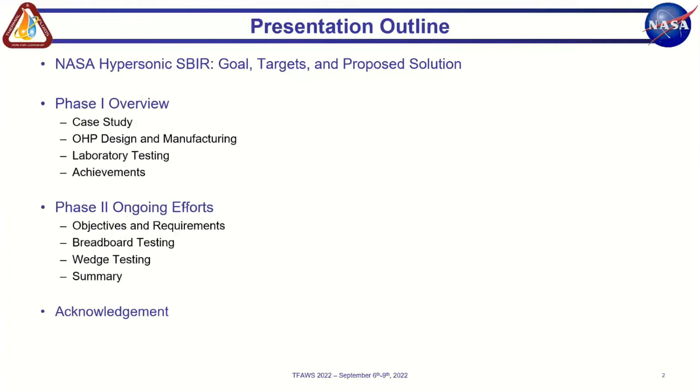Presentation outline: look at that original solicitation that we were responsive to, goals, targets, and our proposed solution. Overview of the phase 1 work, and then overview of the phase 2 work that we are now essentially at the end of the phase 2 period of performance.

The goal of the program was to develop a wing leading edge skin structure with novel integrated thermal management using our flagship technology, the OHP. The SBIR timeline - we're here actually on a no-cost extension to complete some high-value testing that we really wanted to complete on the program, but this program's essentially wrapped up.

The original solicitation from NASA that we submitted the proposal to was looking for these 4 items in particular that really resonated with what we were thinking at the time on the program.

These are looking at manufacturing approaches that can fabricate complex devices such as heat pipe cooled leading edges, lightweight materials that can repeatedly reach high service temperature, capabilities to fabricate complex geometry incorporating integral heat pipes, and multifunctional structures where you incorporate thermal management and structural load capabilities into an integrated component. So a lot of buzzwords here for us in general in terms of multifunctional structures and sort of integral thermal management.

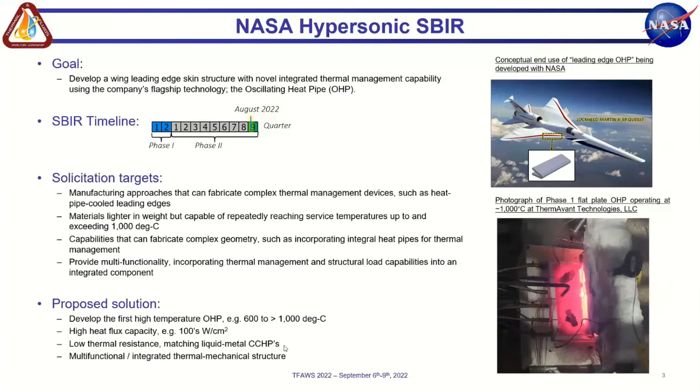So our proposed solution was to develop the first high temp OHPs, looking at 600 up to potentially above 1,000 degrees C, which at the beginning of the phase 1, 3 years ago, had essentially never been demonstrated. Show high heat flux capacity, hundreds of watts per square centimeter input in the evaporator. Show low thermal resistance, similar to liquid metal conventional wick-based heat pipes, and then this multifunctional structure.

At the beginning of the phase 1, we performed a case study to highlight the utility in actually using an OHP structure, and in doing so compared it to solid metal. So the focus here being comparison to other metallic hot structures, not necessarily towards ceramic matrix composite development.

But looking at this case study, we sort of did a little bit of self-teaching about aerothermal heating for hypersonic leading edges. The output of this is looking at what sort of fluxes are generated at the stagnation line for modest radii - not super sharp, but quarter-inch type radius leading edges - at Mach 6 to 8. You generate these sorts of flux levels at that stagnation line.

So there's a couple important relationships to understand the general thermal map. That's at the stagnation point. Heat flux varies inversely with the root of the radius, so as you go to very sharp leading edges, the flux rises rapidly. As you go up in Mach number, the flux rises with the cube of the Mach number. Hence the general thermal problem as we push the envelope on these hypersonic vehicles.

And lastly, how that flux varies radially as you move off the stagnation line point - it actually drops really closely to cosine as you move back around this leading edge.

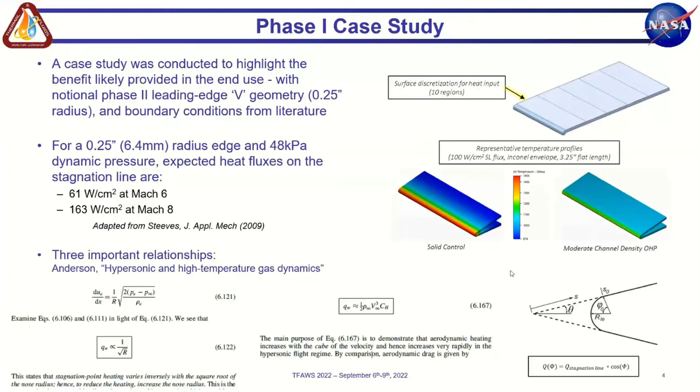So back in the phase 1, we did a series of finite element simulations, and one of the takeaways was we think compared to a solid Inconel leading edge structure, which isn't really a competitive solution for hypersonic leading edges - but if you were looking at that sort of metallic hot structure and you simply converted that structure to including the embedded microchannels and working fluid and had a functional OHP, then you could drop that peak temperature at the leading edge by 250 K at around Mach 6.

So we looked at various sensitivities to different channel densities and transport lengths shown by these other series. But the key takeaway is that OHP enables essentially more aggressive heat input conditions related to higher Mach number flight conditions for some given material's working temperature ceiling.

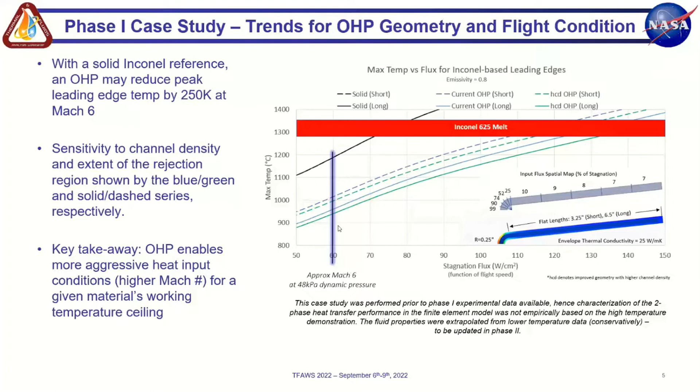So if you're working with an Inconel type superalloy, you might have a mature understanding of the maximum service ceiling in terms of the yield strength of that material or other properties, and by producing the same structure but instead of being a solid conductor, making the OHP, we can vastly improve the thermal characteristics, the ability to transport heat, but retain most of that structural integrity.

So the phase one hardware did not go for gold with the really complex leading edge wedge geometry required, but we went with simple 6-inch scale breadboards because the first push here was to actually demonstrate viable working fluids and functional OHPs in simple geometries, and then a pivot from there to complex geometries.

So we started with traditionally manufactured CNC and vacuum brazed breadboard OHPs at 6-inch scale. You can see one here, and the heat map.

The way they were actually tested, we took this notional future form of a leading edge geometry with a high flux input on the wedge. You transport the heat back and radiate off the adjacent surfaces, with some sort of near adiabatic internal surfaces in the wedge.

And if you flatten that out, you basically get what we tested in phase one and actually in most of phase two as well, in terms of centerline heat input and then radiation and free convection in our test bed off the adjacent surfaces.

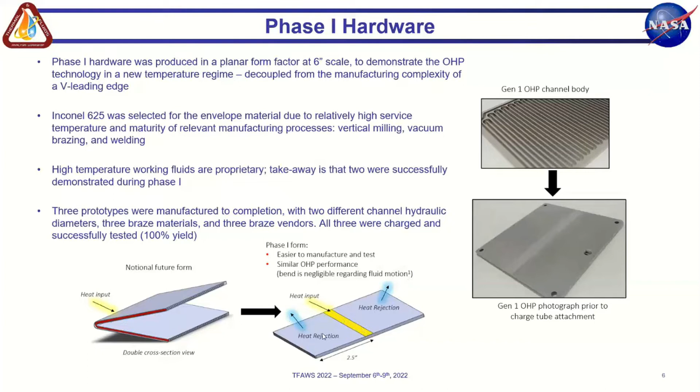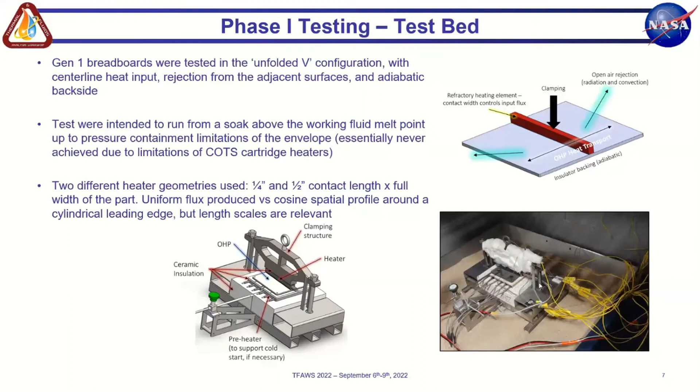So here we see a picture of that phase one test bed, the CAD and the physical one. We worked with two different heat input geometries, a 1/4-inch long contact patch and a 1/2-inch long contact patch, formed by the physical interface with these molybdenum blocks that we used with commercial off-the-shelf Incoloy sheet.

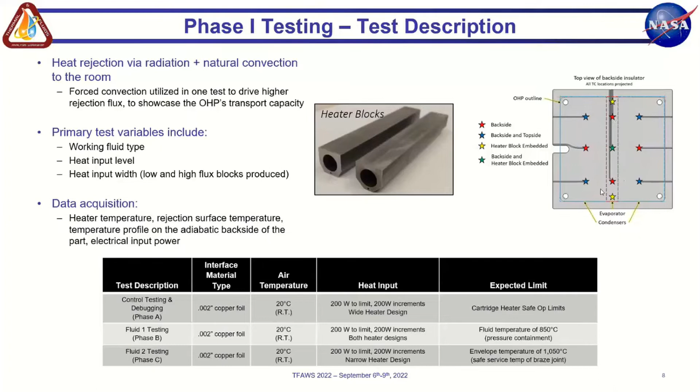Cartridge heaters were fed inside. We applied electrical power that was driven into the OHP evaporator at this clamped interface. TC map shown on the right. We have TCs essentially in the heater block and on the physical rejection surface, but also on the backside where we have that adiabatic boundary, with ability to place TCs there as well.

So coming from effective thermal conductivity of the base envelope, on the order of 20 watts per meter K, up to like an aluminum or better type number, but of course with much higher service temperature than you would see from aluminum or copper.

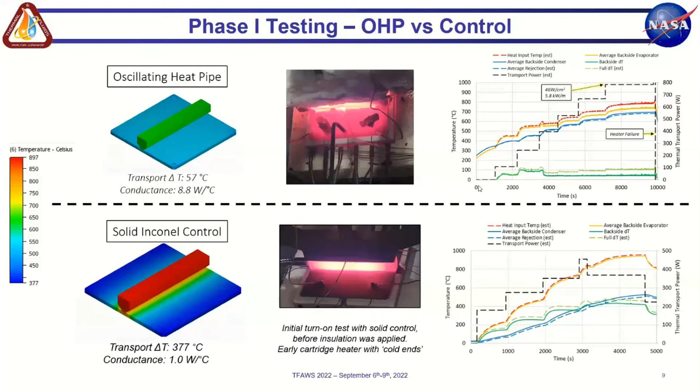We were able to see the onset of nucleate boiling, and in some of the time series plots you can maybe see it here. You see the DT across the device, the spatial gradient drops sharply when we hit a new power step, and the fluid temperature rises. You see that spatial gradient improve sharply, and we attribute that to the onset of nucleate boiling, which is well predicted by this red curve in the limits chart.

And demonstrated actually 2 working fluids during that phase 1, and these, to the surprise of most people, were not liquid metals. These are different elemental fluids that have high vapor pressure. Demonstrated a manufacturing process, so a little bit of MRL development in phase 1 to prepare for the desire to produce wedge geometries in phase 2.

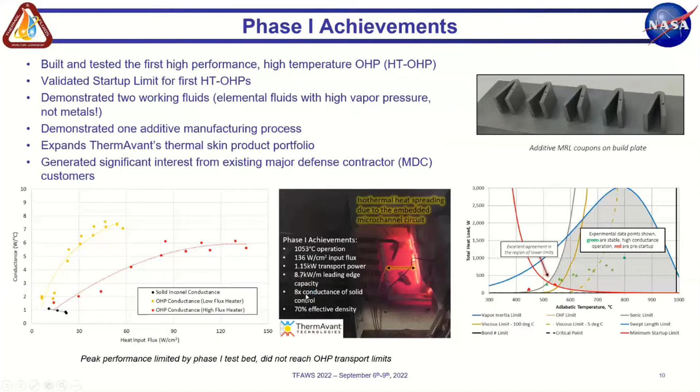All the phase 1 testing was testbed limited, did not reach any OHP transport limits, but we were able to demonstrate these key characteristics shown in bullets: get up to just over 1,000 degrees at the input surface of the Inconel envelope, input flux is a little over 100 watts per square centimeter at the evaporator, 70% effective density of the outer envelope of the same geometry Inconel due to the void space and the lower density fluid charged inside, and approximately 8x conductance of the envelope itself.

So moving to phase 2, a variety of technical objectives and task descriptions, actually an updated program targets that were largely copy-pasted from a DARPA program called MOC. It's an acronym, but looking for a wedge that can take high input flux and survive up to high temperature.

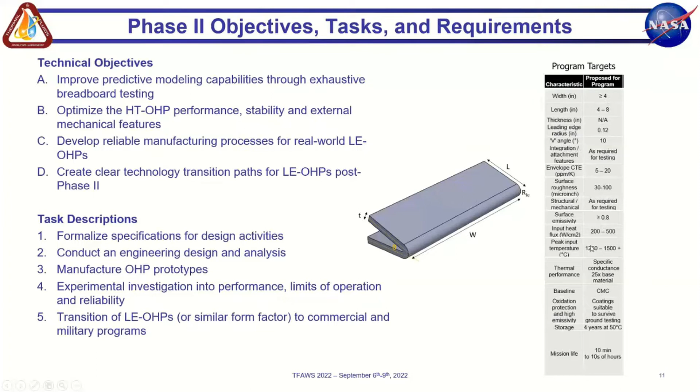So on phase 2, we did a variety of testing organized by the way we heated the part, and the heating configuration in the test bed. Here we have a single heater applying heat to the top center line of the part, and radiation and free convection from the adjacent surfaces.

We pivoted to using a different working fluid, which is liquid metal. We have improved chemical compatibility with the envelope materials of interest, superalloys, wider operating range than the fluid shown in phase 1, higher critical point and lower freezing point, both valuable.

And again, with this new working fluid, we've been able to experimentally demonstrate a predictable startup in relation to the OHP limits of operation.

Originally pioneered by Bruce Drolen, he actually made an update to the startup limit to better match the startup experimental performance we're seeing with the liquid metal working fluid.

Dashed in the boxes in the lower left, we took one of the phase 1 OHPs out of storage after 18 months, lit it back up, and it works nicely after 18 months of storage, actually with the working fluid frozen. Shown on the right is an IR comparison, showcasing qualitatively the isothermality we can see with the OHP microchannels embedded in the envelope.

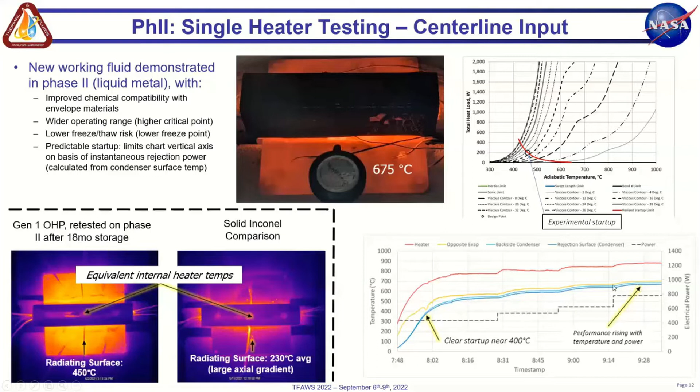As the system gets hotter, you see a dip in the opposite evaporator temperature and improvement in the overall structure's uniformity, measured from that evaporator out to the tips of the part, about 3 inches away from the heat input source. So these series tighten up, showing improved performance as you go up in temperature and power. We're transporting more heat with lower gradient, so the quotient shows steadily improving thermal conductance.

Well, we wanted to go even hotter. Here we're getting up to 675 with the condenser, but we wanted to go hotter. So to do so, we needed a second heater block bolted up opposing the original one in this sort of clamshell sandwich construction.

So we were burning up lots of those Incoloy cartridge heaters, and now with 2 cartridge heaters we're able to run higher powers. At 1.2 kilowatts electrical in this configuration, we're able to drive the condenser surfaces up to 850C.

We internally like this picture on the right a lot - it generated a lot of excitement internally at ThermAvant to see the ability to make these really hot OHPs that are showing good performance.

One asterisk on this testing is we don't actually truly know the physical evaporator temperature, as the thermocouple probes are embedded essentially on the hot side of the thermal interface, adjacent to the cartridge heater. So we know the heater temperature and we know the OHP condenser temperature, but the delta there includes a series thermal resistance from that thermal interface.

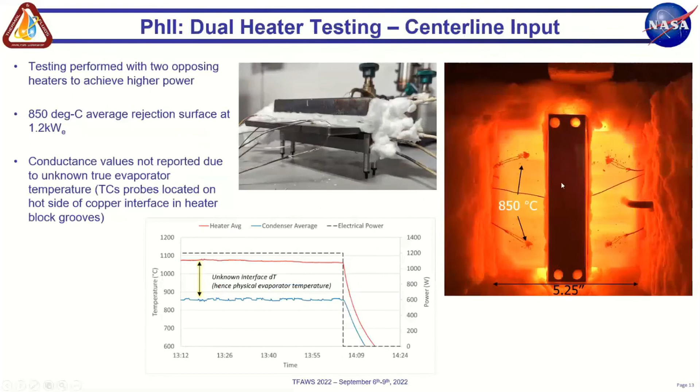Okay, so what's next? We had shown center heating, but the transport distance is only on the order of 2 inches - the full width of the part here is 5 1/4. So we shifted the heater to the edge of the part to try to drive that heat instead of 2.5, more like 4 inches across the part, exploring a longer transport distance.

And it worked well. On this test we got, air quotes, lucky - the cartridge heaters survived with the heater blocks running at the order of 1100 degrees C for this testing, and we were able to get the OHP condenser up to 950C. So this was a really nice test.

We're actually starting to approach the envelope service temperature of that Inconel 625 envelope. The vapor pressure of the fluid inside is actually quite low, as is the nature of liquid metals in this temperature range, so we're not at risk from a factor of safety to pressure containment, but we're out where the yield strength of 625 has really fallen off the cliff. So that's where we pull the plug on pushing the temperature.

All right, so yes, we got about 3 minutes left.

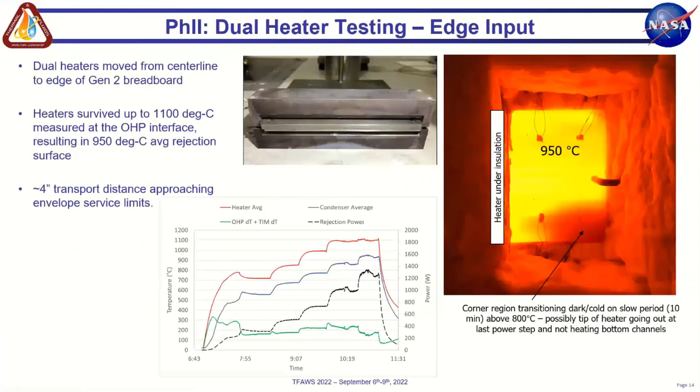Excellent. Okay, so our last breadboard geometry, these planar geometries we tested, was significantly larger - 13.5 inches long, operated in a similar manner. You can see on the right where we put on some Kaowool insulation to provide an adiabatic transport distance, where we have a remote condenser.

So center heated, it's got a transport on the order of 6 inches to a net rejection surface. This worked really nicely, just like the 6-inch scale parts as shown by the IR and the visible here. Again, heat input, about 6-inch transport, able to drive heat out to an 800C condenser.

We have clear, repeatable, and predictable startup at about 550 degrees adiabatic temperature, and actually quite low power. Onset of nucleate boiling here - we can see the spatial gradient in the part fall off a cliff from 500C down to 100 or so, and then again steadily improving performance with temperature and power.

That's plotted here in the lower plot along with the axial flux on the secondary vertical axis. We're actually pushing here, coming up on 2 megawatts per meter squared of the transport cross section, which is a number that's been of interest to some of our folks interested outside of NASA.

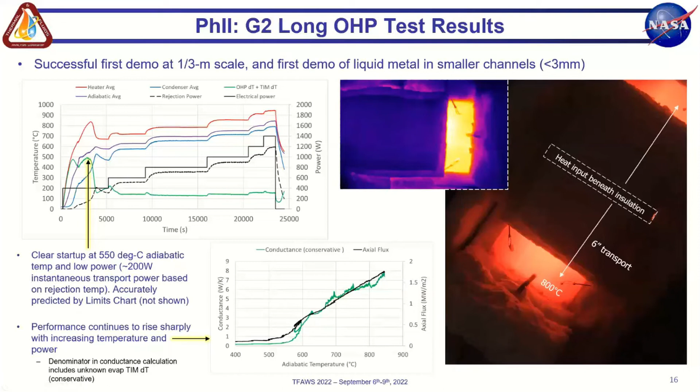Okay, so I only have a minute here. The grand finale was to go from the breadboard geometries that have been demonstrated to the application geometry - a leading edge wedge geometry with this 1/4 inch radius.

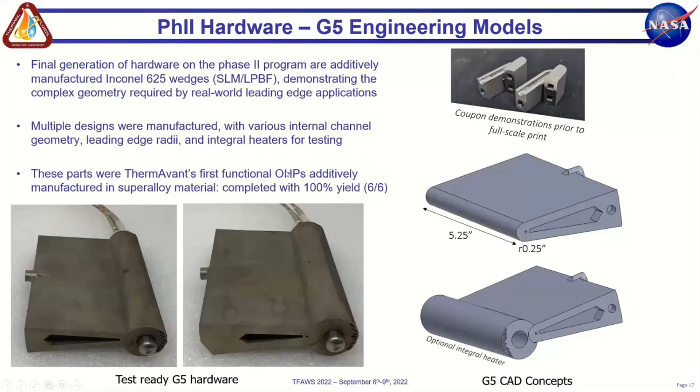So these were additively manufactured and tested successfully. The operation was similar to the same liquid metal working fluid in the planar breadboard geometries of the same scale.

So here we're again using cartridge heaters to drive heat into this tangent point right in the working fluid, which sweeps through the envelope, driving heat right into that tip of the working fluid space. We're able to show a variety of pictures here.

The lower one is a borescope view inside of our argon purged box. Here's a top view through the viewport, able to drive this additively manufactured, powder-based part.

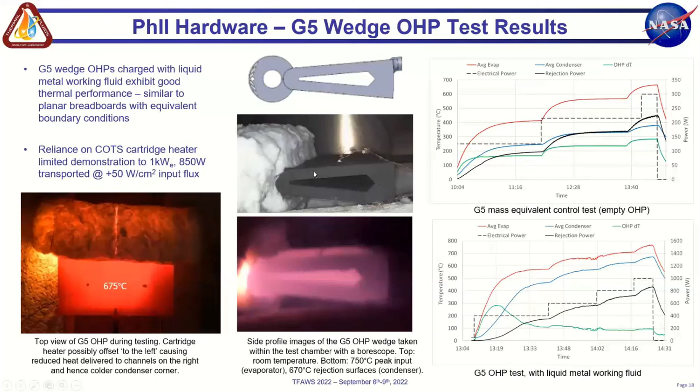In Inconel up to 675 at the condenser surface. We ran the exact same part vented of working fluid, and that time series data shown at the top shows approximately an order of magnitude increase in the conductance of the OHP compared to the mass-equivalent Inconel structure, just vented, as our favorite control.

Some more plots here comparing the thermal resistance to the rejection power. I don't have time to go through these in detail, but one takeaway is that our predicted startup temperature is shown in the dashed series, and where it intersects with the condenser temp is our predicted startup temperature, a prediction made before the test itself for this wedge.

With your eye, you drop down to the thermal resistance, and you can see this is a pretty reasonable startup prediction in terms of the evolution of improvement in the part with power, matching the predicted startup temperature in Q-T space.

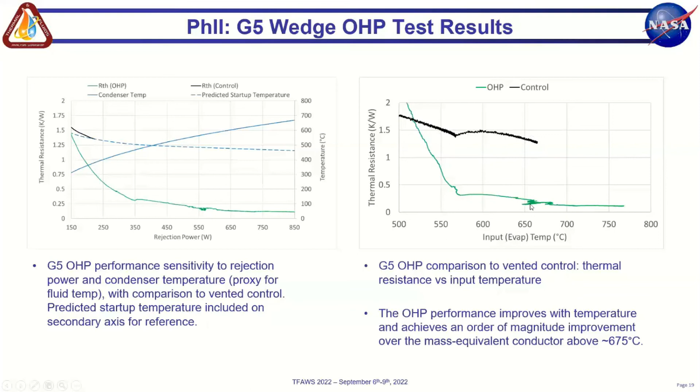Again, on the right, we have a comparison of the control, the mass-equivalent control thermal resistance, to the OHP, and there's about an order of magnitude spread here.

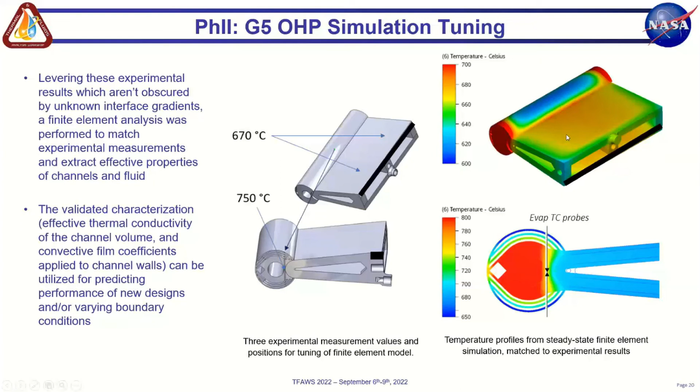So we took these experimental results back into the simulation environment and essentially turned the knobs we have in the finite element environment to match experiment. We can then extract the thermal characterization of both the channel volume and the convective film coefficients applied to the walls, and utilize that for predicting performance of other designs and varying boundary conditions.

So in summary, what we call high temperature, perhaps 400 to 1100 degrees C, oscillating heat pipes in superalloy envelopes have risen to TRL, MRL4 through this effort. We've made complex, additively manufactured geometries up to a third-meter scale successfully, so high yield in manufacturing and successful OHP function.

The phase 2 demonstrations with the new liquid metal working fluid are very promising. We have good thermal performance, a manageable freeze point, and, importantly, unlike phase 1, we now have a heritage of these liquid metal working fluids with superalloy envelopes. So the compatibility and corrosion risk is low, and we're pleased with that.

No hot limit - a transport capacity limitation of the structure due to very high input flux or some other condition - has been observed in any testing to date. Somewhat unfortunately, we would love to validate the predictions of how much heat these structures can transport, but we weren't able to get there with the existing test bed.

Power limitations allowed us to push up to about 2 kilowatts electrical, but we weren't able to show the temperature limit of these liquid metal working fluids, since we couldn't push above about 1100 C on the Inconel envelope, so perhaps 1000 C fluid temperature. We would need to go up to maybe a niobium alloy type envelope in the future to really see where we run into transport capacity limitations due to temperature.

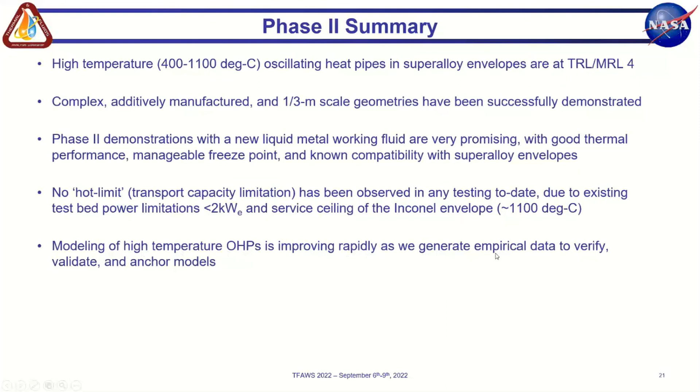One last takeaway is that our modeling ability for these extreme temperature OHPs is improving rapidly in the last several months due to testing, as we can now generate empirical data sets to verify, validate, and anchor the models.